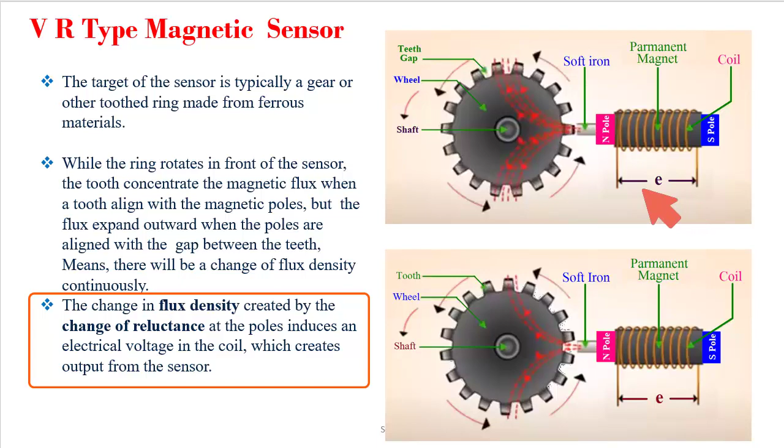The change in flux density, created by the change of reluctance at the poles, induces an electrical voltage in the coil, which creates the output from the sensor. As a time varying flux is cut by this coil, due to the electromagnetic induction property, a potential will be generated at the coil, meaning a potential difference will be created at its two terminals. This is the nature of the output.

The magnitude of this output varies with respect to time. The frequency of this output is controlled by the speed of rotation and the number of teeth in the target. For example, a 100 teeth gear turning at 1800 rpm generates an output frequency of 3000 Hz.

The amplitude of this signal is affected by the speed of rotation, the material being sensed, and the air gap between the sensor tip and the rotating object. Most manufacturers of magnetic sensors base their design on having very small air gaps of 0.005 inches to 0.015 inches.

This variable reluctance type magnetic sensor is a passive device, as there is no requirement of any external source of power to generate the output signal, though the output signal itself is an electrical signal.

In summary, the variable reluctance sensor converts mechanical motion into electrical energy without direct contact, when positioned near a turning rotor, gear, shaft or other regular moving device. This output signal can be fed into a digital counter, totalizer, analog converter, tachometer, overspeed or underspeed control, oscilloscope, or other monitoring and control devices.

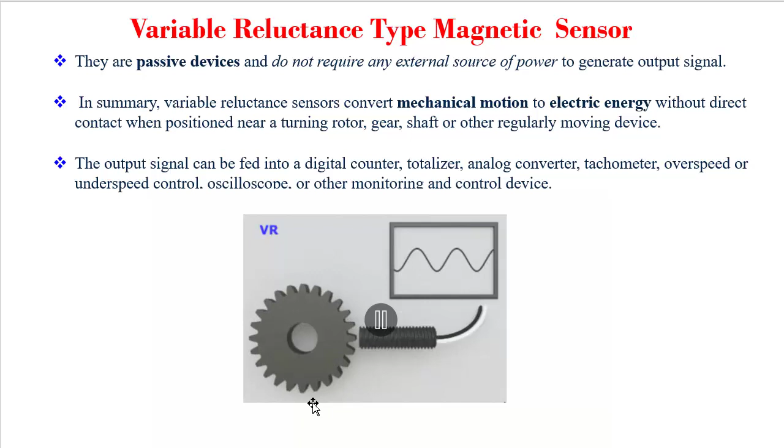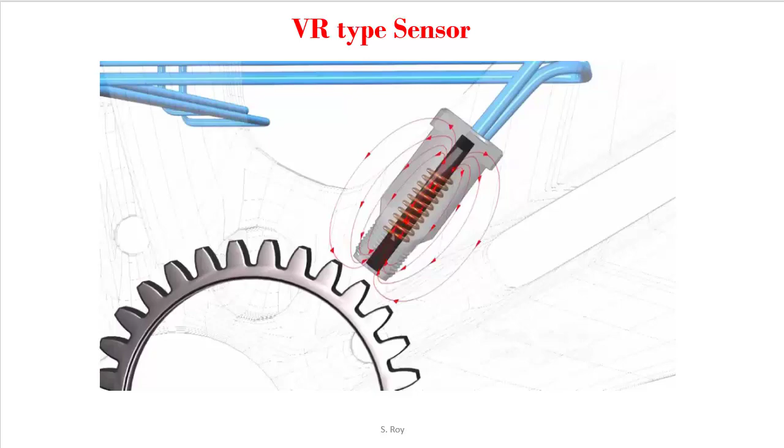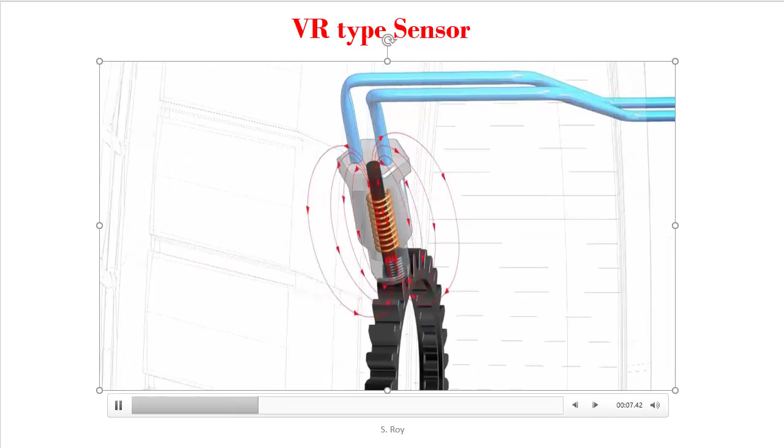Here I am showing another animation. From here we can easily understand how the density of magnetic flux changes in the presence and absence of teeth of the moving object. The magnetic flux changes with respect to the position of the teeth. So it is clear that the presence of teeth in front of the sensor, versus the absence of teeth, that is presence of air gap, ultimately changes the magnetic flux density, which in turn changes the amplitude of the output produced at the coil.

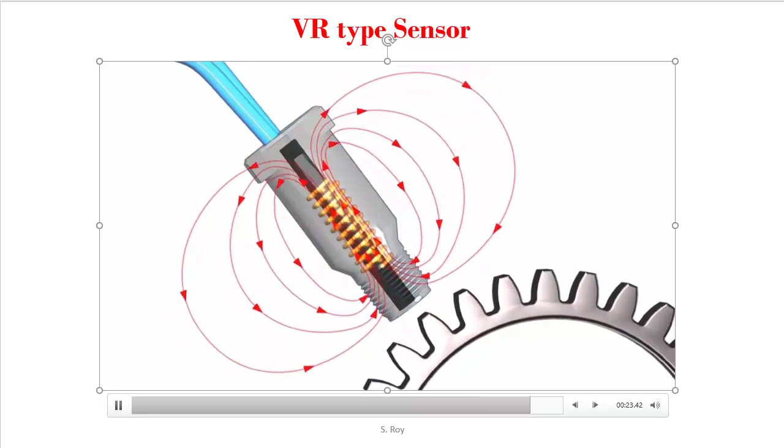Output from this sensor ultimately passes through different signal conditioning circuits, and we get different types of analog outputs as well as digital outputs as per our requirement.

Advantages of the variable reluctance type sensor: they do not need an external power supply, the cost is low, weight is light, they are very robust and can work in harsh environments, including high temperature and high vibration environments.

Few disadvantages are: it is difficult to measure low speeds, and additional signal processing circuitry is required. There are lots of applications like gear tooth speed measurement, turbine speed measurement, etc.

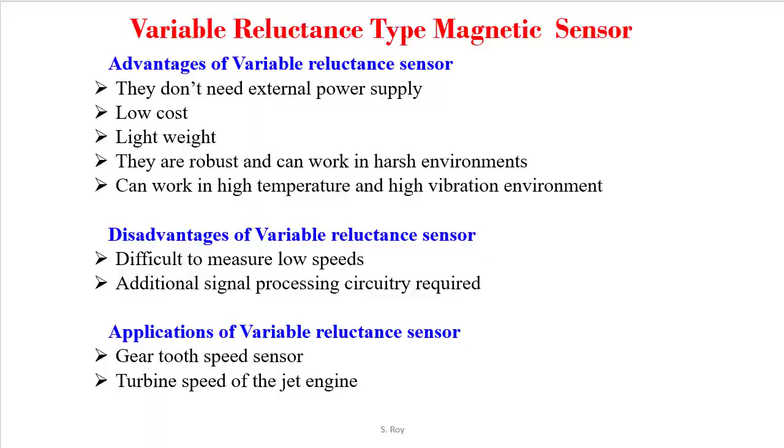So from this discussion we get a little idea on variable reluctance type magnetic sensor.